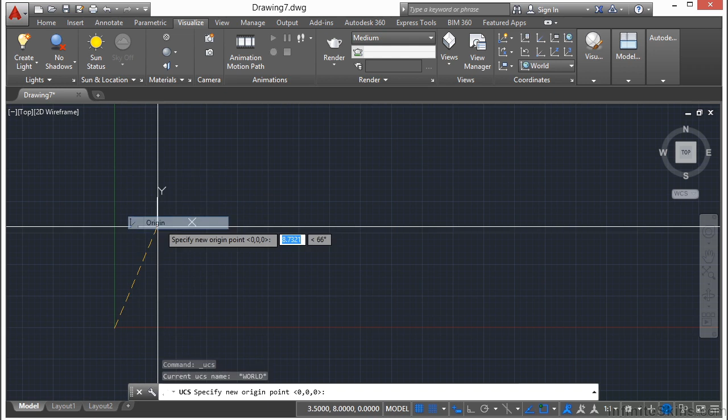You can also get to a lot of these options simply by right-clicking on top of the UCS icon. You can go back to your world coordinate system just by selecting the World option, or you can create a new UCS. You can select that by origin, so you just pick a new point, and there's the UCS. You can see that little box is off in the corner.

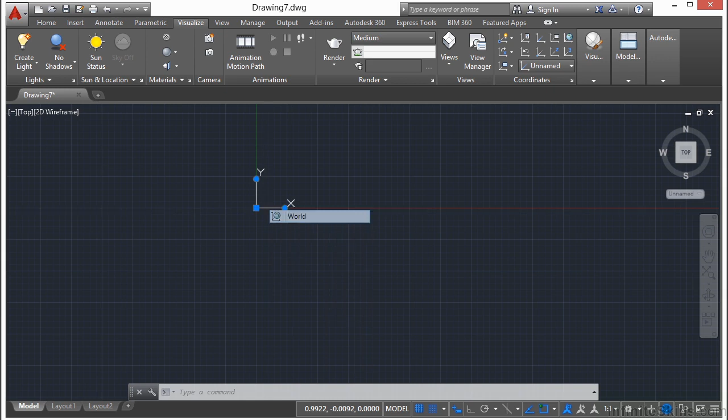That tells you that this is a customized user coordinate system, not the world coordinate system. If I select the UCS, I also get some grip options, which we'll talk about later on. But if I right-click on it and click World, that puts me back to my regular world coordinate system.

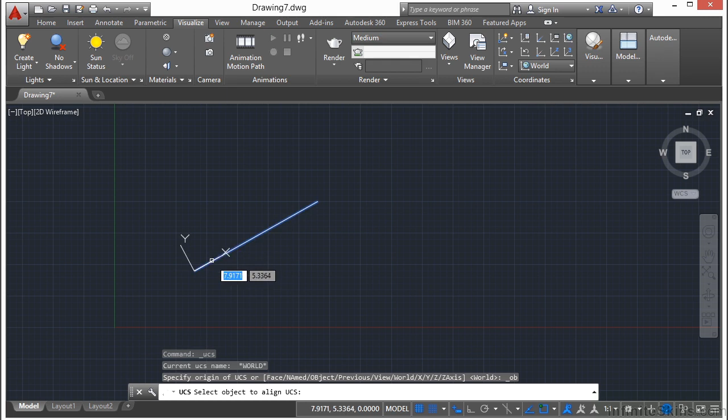So if I have a line, or any other object—I'm just going to pick a line—and right-click on my UCS icon, and select the Object option. I pick an object, and as you can see, it gives me a little preview. That becomes my new user coordinate system.

So it moves my UCS to a new origin, and rotates it to match the angle of the object I selected. So now if I draw a line, and turn on my ortho by pressing F8, it locks me into these orthogonal lines, which are normally perfectly horizontal or vertical, but in this case it's matching the horizontal and vertical of my new user coordinate system. This is a great tool to draw things at specific angles quite easily.

Now, when you work in 3D, the UCS is key. There's a function called the dynamic UCS feature that will automatically change your UCS to match the face of an object, allowing you to draw on that same plane as the object selected. That's probably one of the most commonly used cases of changing your user coordinate system, when you're working in 3D. Now, that's getting a little heavy for this course.

It's hard enough to keep track of just 2 axes, much less 3 or 4 or 5 different coordinate systems that you might want to use. So we're going to try to keep it more simple for you in this introduction. You can create your new UCS from scratch by picking a couple of different points. You can even select the icon and just rotate it or move it.

My ortho is on, so I'm going to turn that off. As you can see here, it's quite simple to just rotate the UCS that way. You can grip edit it just to move it to a new place or to make slight rotations, whatever you need to do.

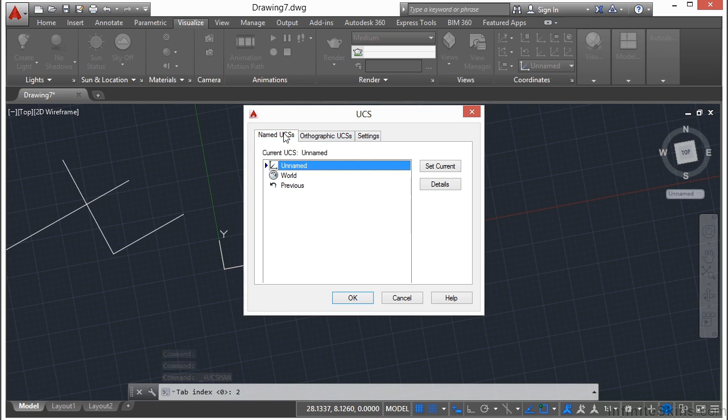Now, if you come up to the Visualize tab again, you see here we have unnamed, world, top, bottom, etc. I can click on this little button right here, it says Flyout, and this will get me to my UCS Manager. So I can get to it that way, which is a real easy way to manage it, or I can come up here to my UCS named UCS option. I can select that, it gets me back to the same place. And if I go to my UCS icon, right click on it and click on the named UCS option.

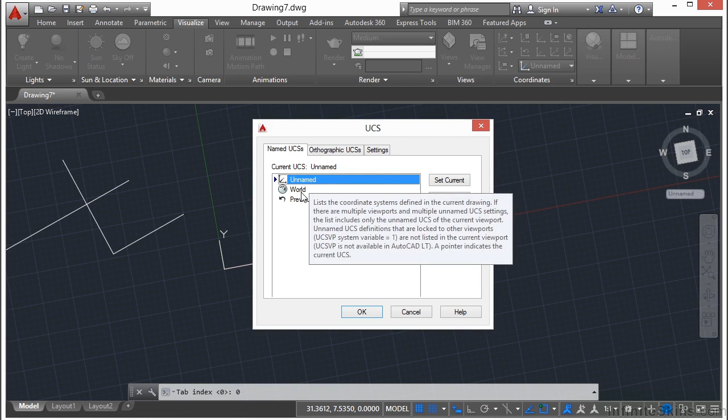So when I come here, it tells me I have two different options. Essentially, I can go back to the world coordinate system. If I select it and hit the Set Current option, then that's where it will take me. It'll set this selected UCS as my current UCS. Now I can select the previous one, and that will take me back to whatever UCS I was using right before the current one. Now this is the current one and it's unnamed.

If I select inside this box, once I pick it again, I can give it a name. I'm just going to call it Custom 1, press Return. Set current, and it's current. I click OK, and I have it saved in here now whenever I want to use it.

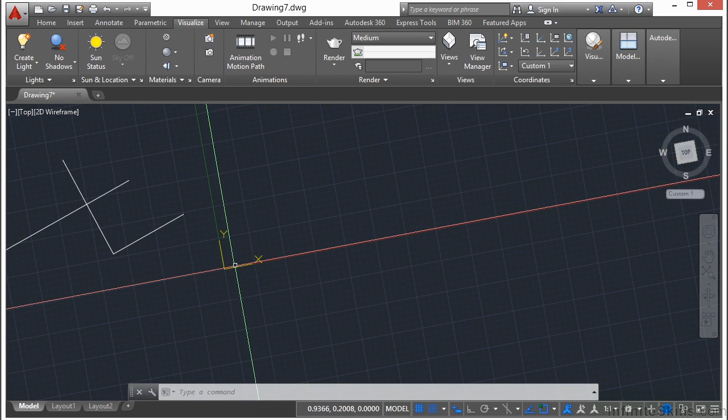So let's say I go back to my world coordinate system. And if you note here, I'll open up my UCS Manager, go to my named UCS. I have the Custom 1 as a possibility. I select it to highlight it and then hit Set Current. Click OK, and it brings me right back to where I was.

So if you go to the trouble of creating a custom user coordinate system, then you really need to save that in case you need to go back and continue working where you were before. So that's one trick you can use to help you work in a different coordinate system and to manage that as well. Using a rotated UCS is great for isometric drawings, as you could probably see.

But AutoCAD does have a specific mode for that called isometric mode. This allows you to toggle your rotation very quickly, and it's actually quicker and easier to use than UCS.

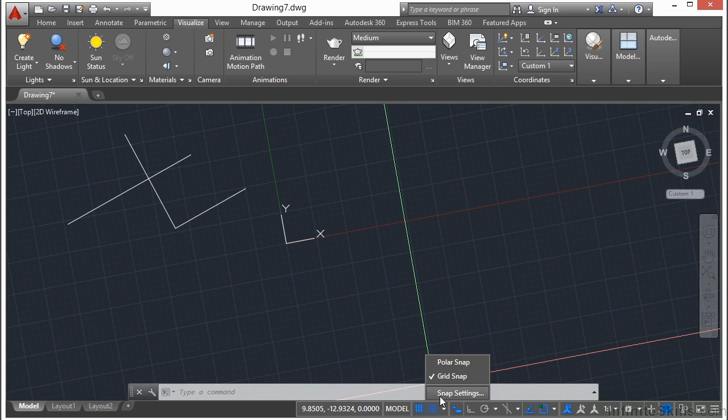Let's open up our drafting settings dialog box by right-clicking the snap icon in the status bar. Come down here, right-click on it, go to snap settings. Go to the snap type option here and click on isometric snap. That's what you're going to want to do. You want to turn that on, it will turn on isometric mode. And click OK. So now you see here, you have a sort of skewed and diamond-shaped set of crosshairs.

So let's start drawing. If I draw here and I turn on F8, this will lock me into isometric mode so that I can now draw a 3D isometric set of line work. So I can kind of draw an isometric view of a cube.

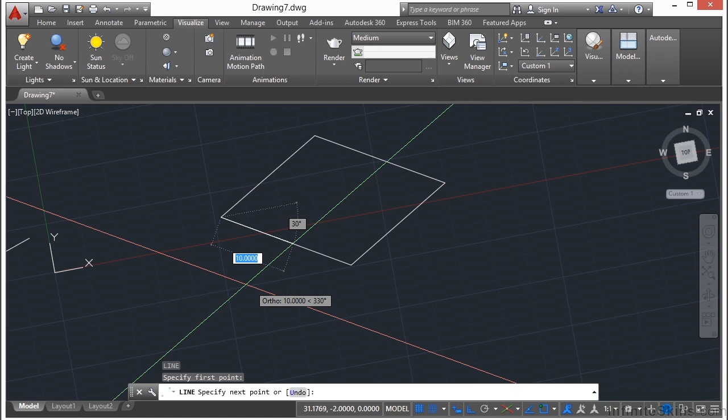So I can come down here and press F5 to toggle through my different isometric planes. And you can see as I toggle through them, my axes change. And by very quickly pressing the F5 button, I can very easily draw whatever it is I need to draw. It looks like I've drawn a 3D box, though I've never left my 2 dimensions.

So whereas drawing with UCS can make an isometric easy, it can, but it's in one plane only. So you have to keep changing your UCS to get that special look that you need.

You can also use the isometric settings, and you can go to that just by right-clicking on the snap settings, click the snap settings button, and make sure the snap type is turned to isometric to do that special view. And you press the F5 button to toggle through, or you can click here on the status bar to toggle through the different isometrics, tops, and other views that you want.

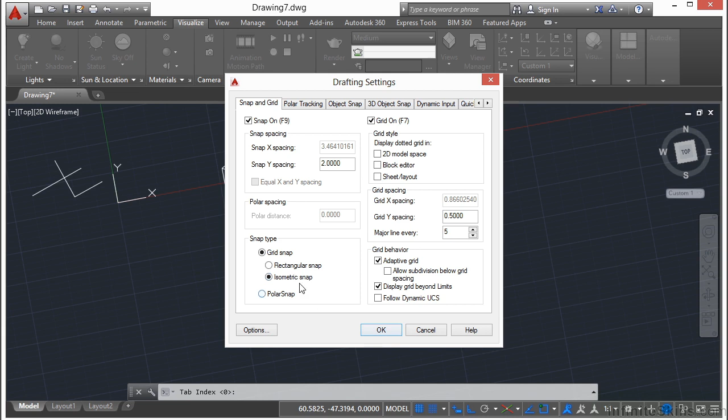And when you're finished, make sure you turn this back. And there you go. So you can see how a UCS that you've customized can really help you out in making specialized drawings.